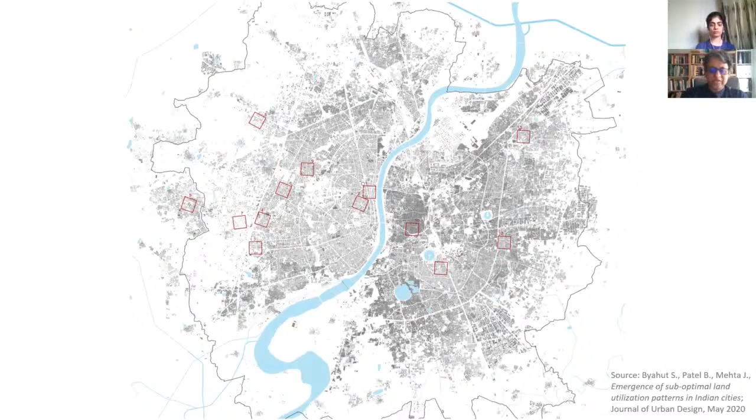These multiple squares represent different areas studied to understand land utilization. For example, this is Ahmedabad's central area, the Ashram Road. If you look at the area covered under building footprints versus private domain versus public domain, the pie chart shows almost 57% of the area is under private open space, only 26% is under building footprint, and only 17% is in public streets and public open spaces.

So if you see how well our cities and urban patterns are utilizing urban land, only 26% is really built, and 74% is in non-built domain, with 57% of that being private open spaces.

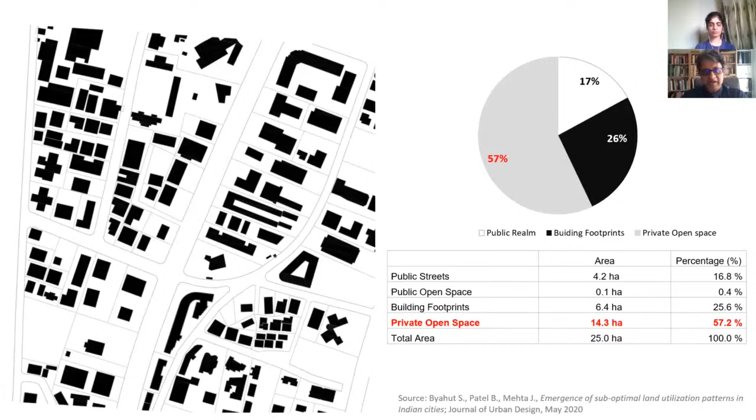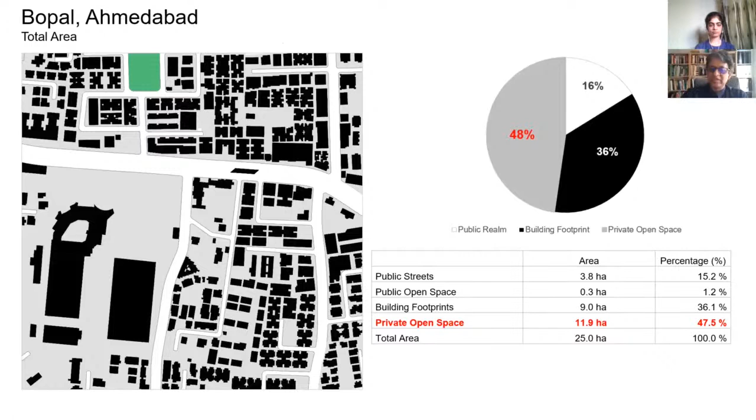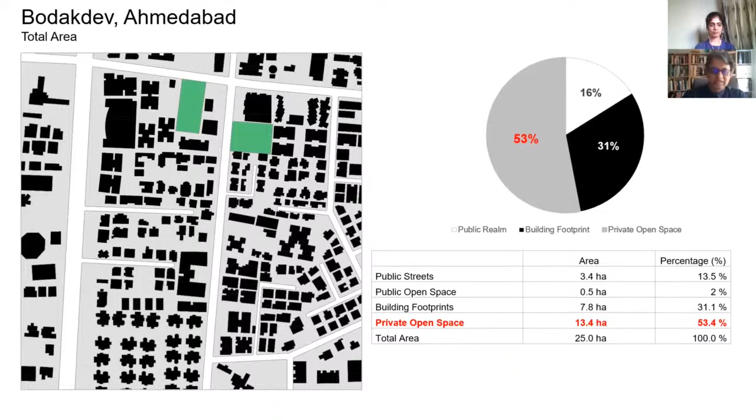In other areas of Ahmedabad, for example Bopal, the breakup is almost 48% private open spaces, 36% building footprints, and 16% streets and public open spaces. Another area, Bodakdev, relatively newer, shows a similar pattern: 53% private open spaces, 31% building footprints, and 16% streets. Science City shows the same story.

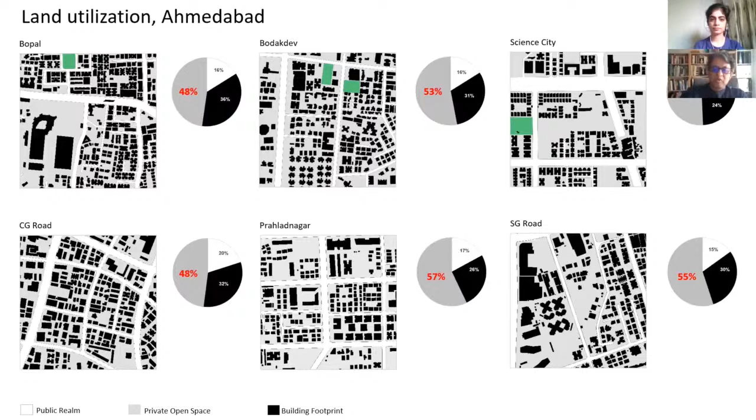Essentially, what's happening is that almost 50% or more of our urban land is generally within private open spaces, and the other half is divided between built area and usable public open spaces like streets and green spaces.

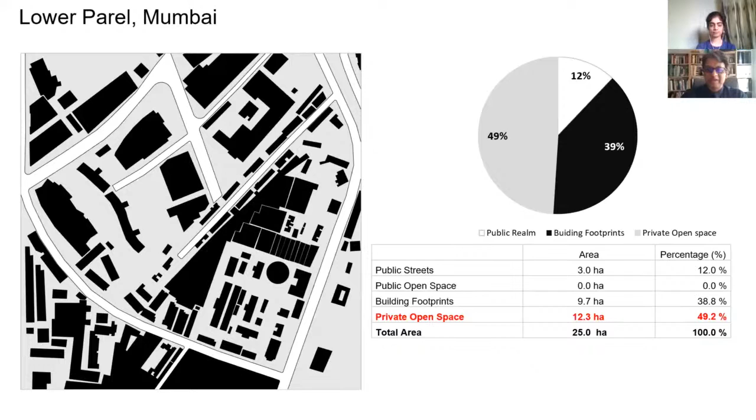Similar story in other cities like Mumbai. This is Lower Parel, and converting that into the same diagrams, you see almost 49% as private open spaces. Here the street percentage is even lower, with large blocks, only 12% under streets, and virtually no public open spaces, though there might be private ones. 39% is built, and if you know this area, you'll see newer high-rise developments, some industrial sheds, and some informal settlements, all combined making up that 39%.

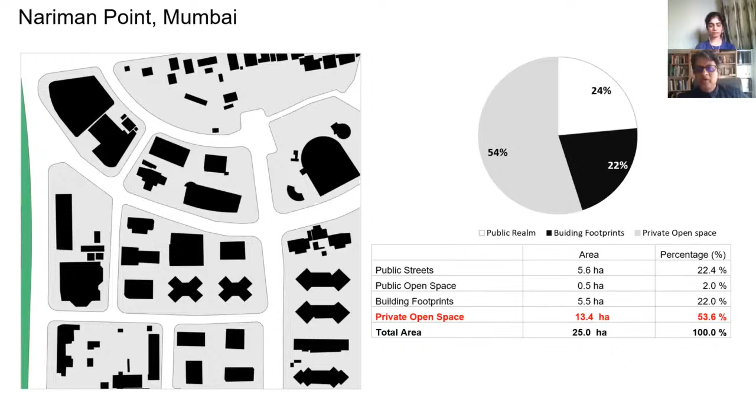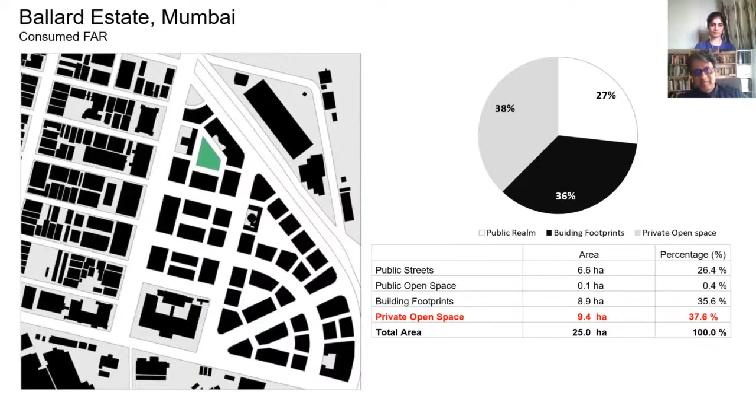Nariman Point, a more organized area, shows 54% private open spaces, with relatively more public open space at 24%. BKC shows a similar story. Ballard Estate is a bit different - an older area where 36% is built, 38% is private open, and 27%, relatively higher, is in public open spaces.

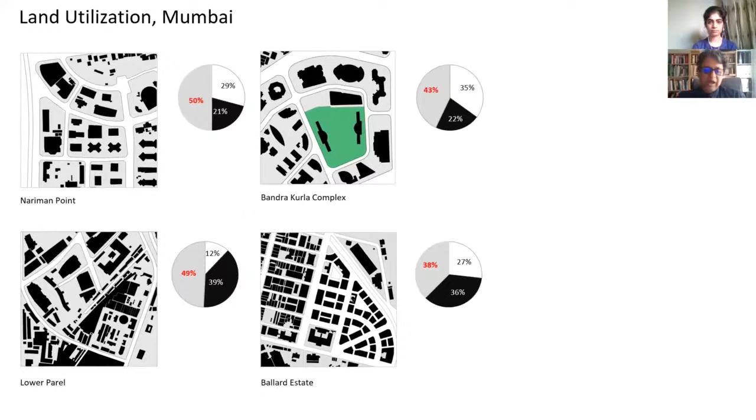So essentially, when you start looking at how urban land is utilized, you realize almost 50% or more of the area is in private open spaces. We'll talk more about that.

Compared to that, if you look at cities abroad, for example downtown San Francisco, you won't find much private open space at all. Most of the land area is covered either by built structures or by streets and green spaces, all of which are utilizable by people.

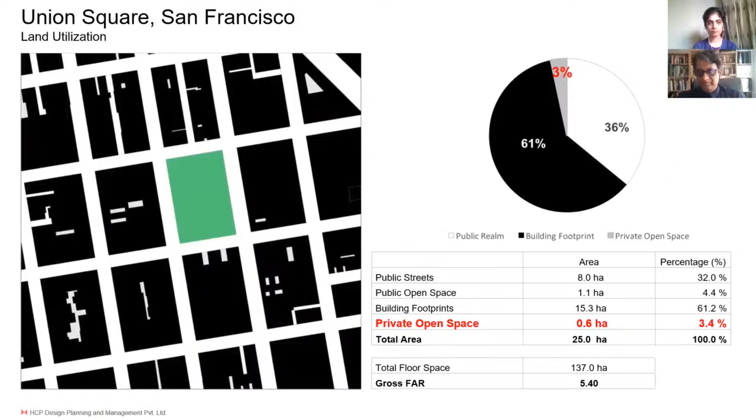Similarly in Paris, more than 50% is built, 34% is public open, and only 10% is private open. Even those private spaces are in the rear of buildings, either courtyards or backyards.

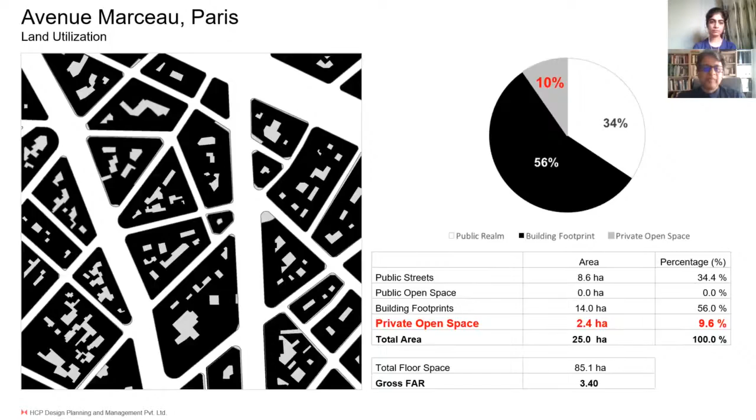Barcelona shows a similar pattern. Then the eastern example, Hong Kong's Mong Kok area, again shows almost 50% public open, primarily in streets, because here the block sizes are very narrow and small, with the street area much bigger.

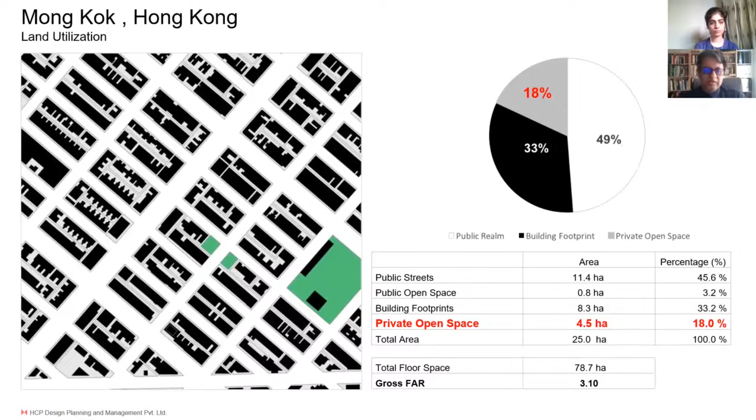So the question is, how efficiently is urban land utilized in Indian cities? As we said, approximately 50% or more land remains under private open space even in recently developed areas. These private open spaces are cut up into multiple small slivers and margins with compound walls and other encroachments, and most frequently covered with illegal, temporary, or permanent structures or plinths. So they generally end up not being efficiently used. The resulting urban patterns have inefficient use of land, with encroached margins, compound walls, and incoherent, unintentional built form.

So what has caused such urban patterns in Indian cities? The answer lies in the DCRs, the Development Control Regulations, which govern these private open spaces.

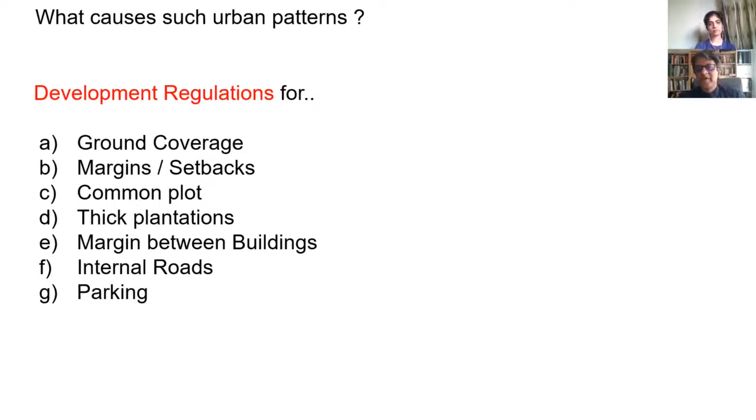And these are those regulations, if you see: ground coverage, margins or setbacks, common plot requirements, thick plantation requirements, margin between buildings that are required, internal roads, parkings - all these elements. Some of them are important, some are critical, some are not. But all these combined together really impact the private open space requirement.

So the question is, why such regulations? They are commonly accepted as standard practice without much questioning. They are based on certain underlying assumptions, which are never made explicit, nor are they based on any empirical studies or evidences. So what I would like to do is question some of these underlying assumptions and see whether we really need these kind of regulations, or can we change them and keep only the ones that are necessary, and get rid of the ones that are not necessary, to improve the urban form of our Indian cities.

Okay, there are a few underlying assumptions. One, for example, ground coverage regulations provide much required open space in our cities. And it's an assumption - a lot of people would generally believe it's true, but we need to really think about it. The next one is about margins.

Margins are required for fire safety - another assumption. Margins result in addition of green spaces. Margins and ground coverages are a must for air and ventilation. Margins are required for parking. Common plots are required for community gathering and play areas.

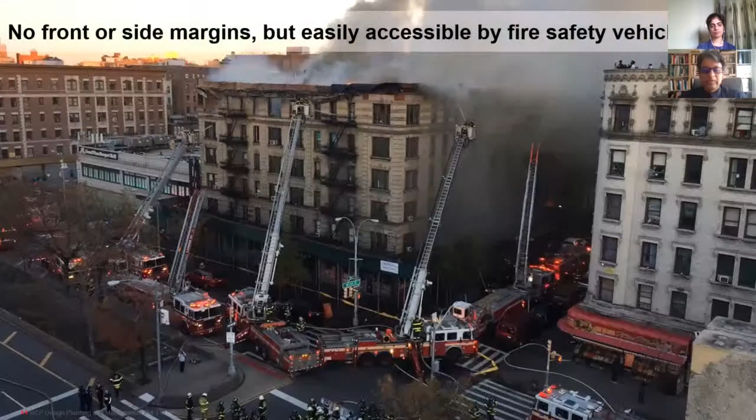So some other visuals. The other assumption people end up making: margins result in addition of green spaces. In reality, only a few of these margins result in green spaces. Generally, they are all covered, paved for different purposes, primarily for parking, and you would find very little green space in these areas.

And for various reasons, they would pave it over, either for parking, or maybe so that the dust problem is reduced, or sometimes people say greenery brings mosquitoes and other things, so they end up paving it over. So if these margins are combined into a single common space, instead of having them in front or side, it will result in much larger, easily accessible and more usable green spaces.

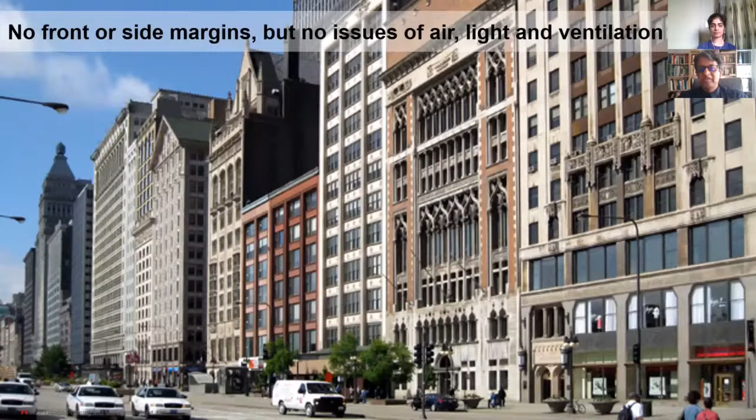This is the so-called front facade of the city of Chicago, the Michigan Avenue, and these are all old high rises, new high rises, and you can see where are the margins, and still all of these buildings work very well. There are different ways of getting light and ventilation.

In Western cities, more often now they use air conditioning, but also the older buildings had atriums and also ventilation from the front and the rear. These are some of these older patterns where it's only the front and the rear, and also we have examples of Indian cities.

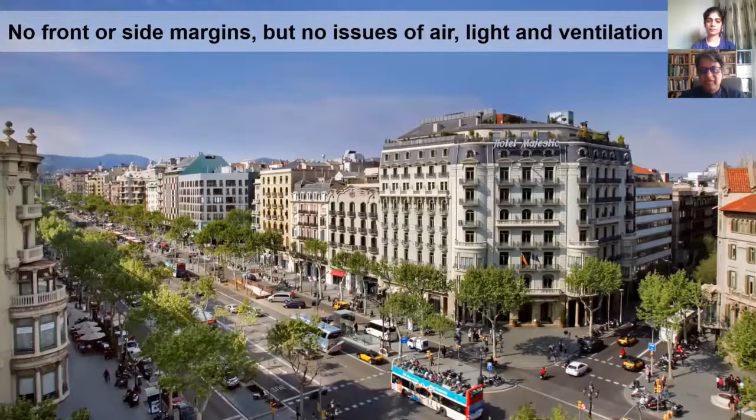Delhi's urban patterns, or if you look at Jaipur, for example, old cities, and most of our old cities, they didn't have side margins. Old city Jaipur, old city Ahmedabad, all the pol houses, or any other such old cities. Essentially what I meant to say was that there are various different ways, and you don't have to have margins for those things. There are different ways in which you can deal with it.

The next assumption is margins are required for parking. A lot of times that's why people say we have to have front margins, because otherwise where would people park? In reality, margin spaces remain a lot of times vacant, inaccessible for vehicles, and underutilized in a lot of cases.

Here's another example where the front margin, the roadside margin, the plan would be passed showing that people will be able to park their vehicles in the front margin, and therefore it satisfies the parking requirement. But then you end up seeing that all the vehicles are parked on the road. Similar cases exist in a lot of places.

Next one is common plots. Common plots are required for community activities and for children to play, which is true. But very often, these spaces are also encroached by parking. And if you see a lot of these regulations, they require common plots even for commercial buildings.

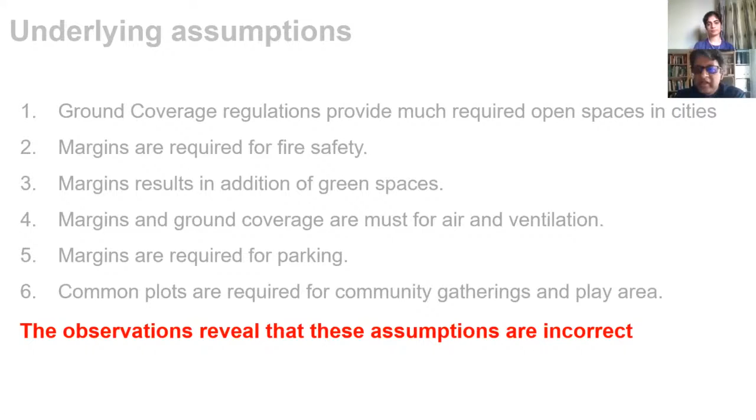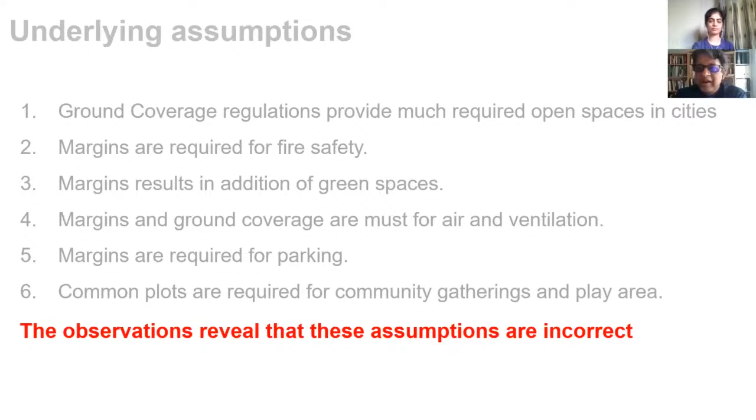So these observations really reveal that a lot of these assumptions are not accurate. I would not say they are absolutely incorrect, but a lot of times they require questioning, and that's what we need to do. We need to figure out what kind of regulations we need to have to achieve the right urban form and the right urban environment. So how can we really improve the regulations?

Our current development patterns are a result of conventional approach to zoning and regulations. Is there another approach? And the answer to that is yes. There is a conventional approach, which is pretty much a rule-based approach, but also then there is a form-based approach. And that form-based approach is derived considering the ultimate outcome of urban form, and based on that, everything is identified.

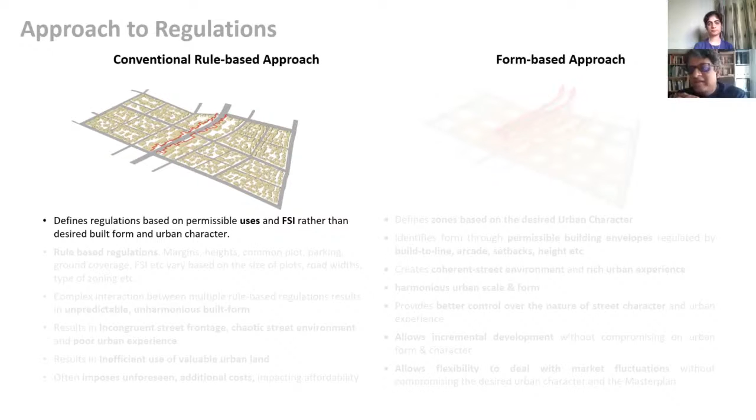So let's just quickly go through one by one. Generally, conventional rule-based approach would define regulations based on permissible uses and FSIs rather than desired built form and urban character. We all know the zoning and regulations the way it is done in our cities, and generally when such plans are prepared, the ultimate urban form is not really the focus. The main focus is how many people will come and live here, and whether we'll have sufficient infrastructure and urban amenities. Yes, all those things are necessary, but also more critical is the urban form.

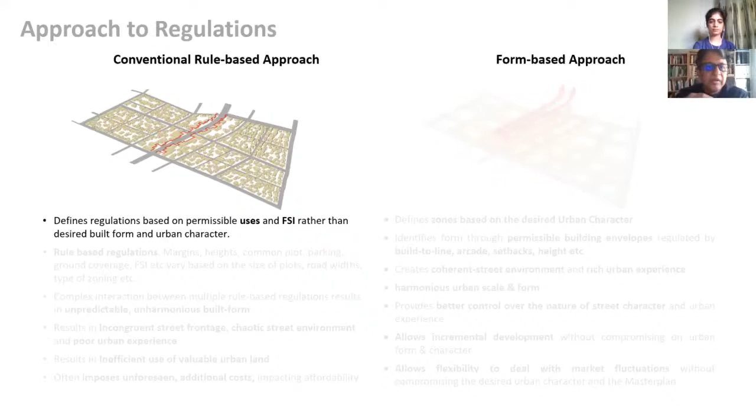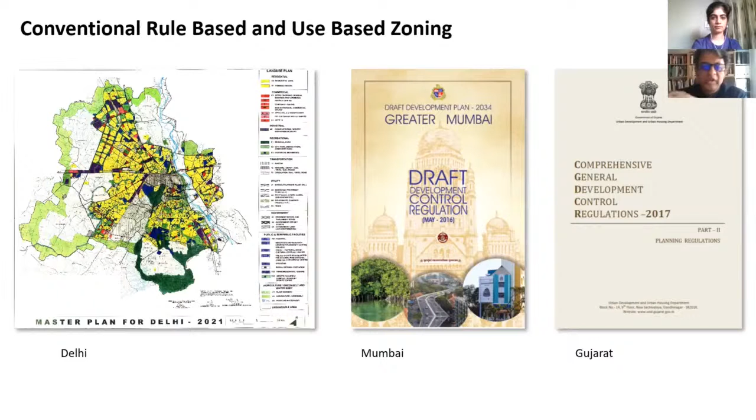These are examples of conventional rule-based zoning and regulations. All of our current regulations are more or less this conventional patterned regulations. The rule-based regulations include rules for margins, heights, common plots, parking, FSI, etc., which all vary based on either plot size or road width or different types of zoning. And when you actually start putting all these regulations together, it's very difficult to really imagine what kind of urban form would come out of it.

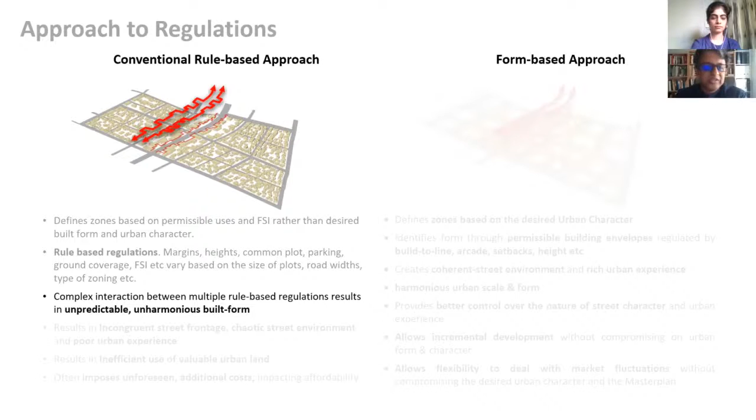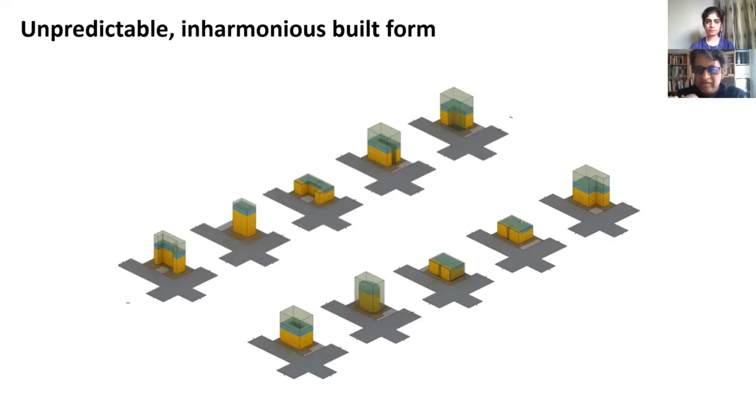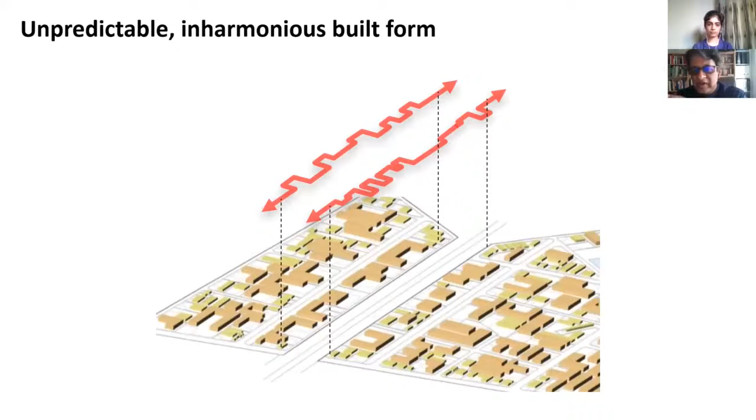The complex interaction between these multiple rule-based regulations results in unpredictable, unharmonious built form. You can see the same regulations can result in all these different building types and building forms. So you can imagine a street with one set of regulations but not having coherent built form, and that's what generally ends up happening. Now you don't have very clear street frontages, or very clear urban patterns, different heights, different things. So the ultimate result is incongruent street frontages, chaotic street environment, and poor urban experience.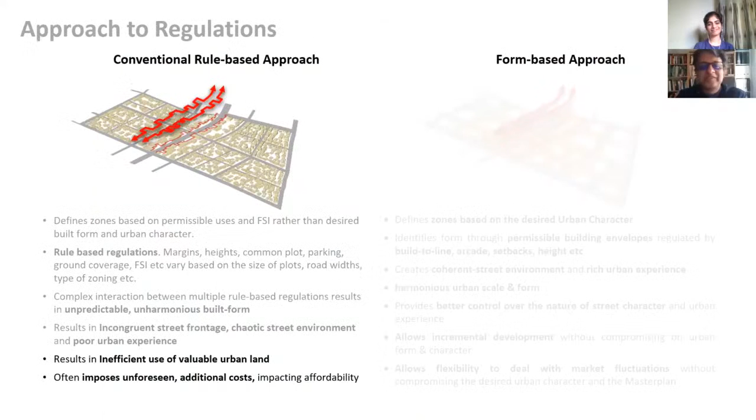You all know many of such places. And it also results in inefficient use of valuable urban land. Often it imposes unforeseen additional costs and impacts affordability. So compared to that, when you start looking at...

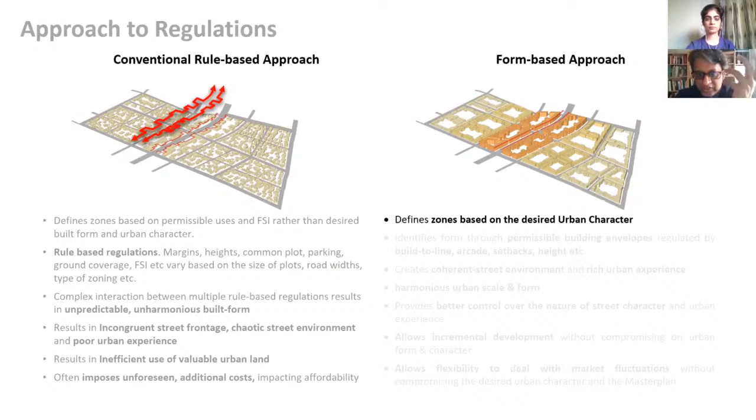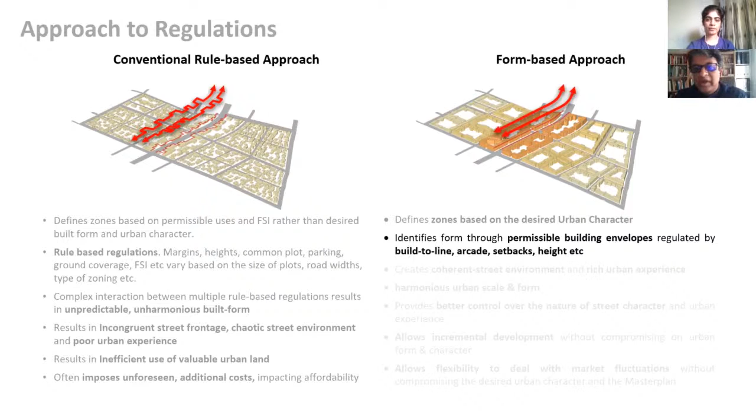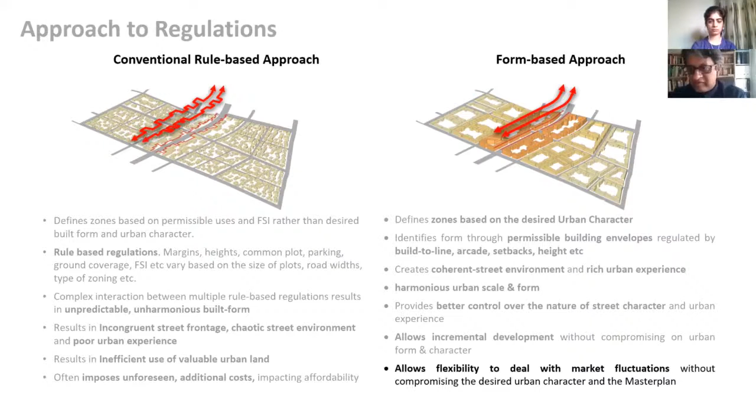Form-based approach generally defines zones based on the desired urban form and character. It's not rule-based - it considers first the ultimate urban form, and also identifies form through permissible building envelopes regulated by build-to-line, arcade, setbacks, heights, etc. This creates a coherent street environment and rich urban experience, harmonious urban scale and form, and provides better control over the nature of streets and street character and urban experience, allowing incremental development without compromising on urban form and character. So with this form-based approach, regardless of which area develops first or next, the urban form remains coherent, and it allows flexibility to deal with market fluctuations without compromising on urban character.

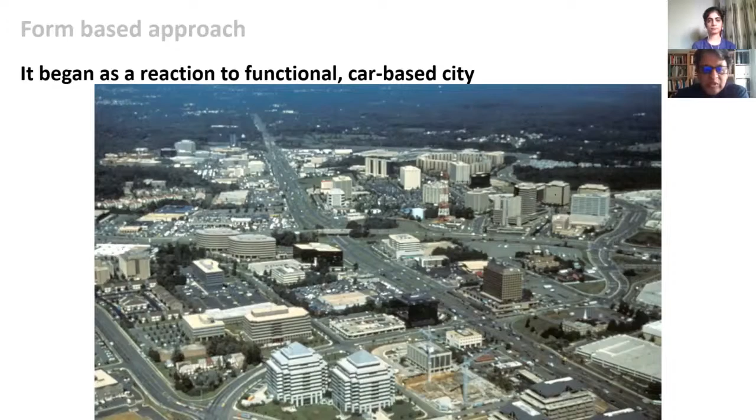Let me go back a little to the background of how this urban form-based approach came up. It began with people realizing that the functional approach to city planning had resulted in very auto-oriented, car-focused cities. This was a realization about four decades back, primarily in Western countries, where people started realizing our cities are actually made for cars and not really for people. It's very difficult for people to walk and navigate through these cities, and not just city centers, but also suburbs started becoming car-based, making it almost impossible for a person to get out of their home and just walk to shop, or to school, or to get anything really.

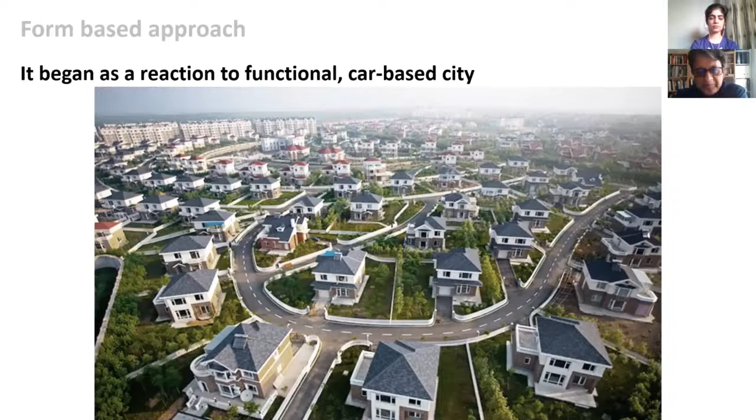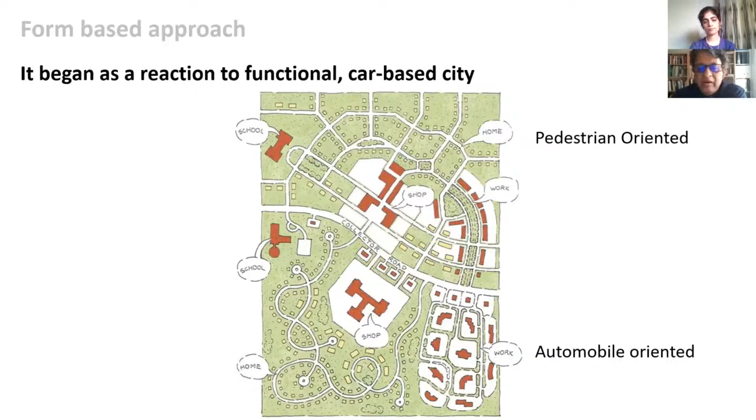So the approach really started - people began exploring new approaches, and they realized there are other ways of planning cities which can be pedestrian oriented instead of automobile oriented. You can see these two patterns: the pattern in the north is more pedestrian friendly because it offers easy walkable development - easy walk to shop, work, school, etc. Versus the lower part, which is completely auto oriented, because if you want to go from your home to shop, you'll have to get into your car, drive to the main road, and then go into your mall. So that's the conventional pattern versus the pedestrian oriented pattern that you need to achieve.

And that gave rise to the new urbanism movement. What they started thinking about was the transect - not based on residential, commercial, institutional use, but based on urban character. They identify the transect based on the urban core zone, which would have high urban character, then urban center, general urban zone, suburban zone, then rural and natural. And based on that, various elements are regulated.

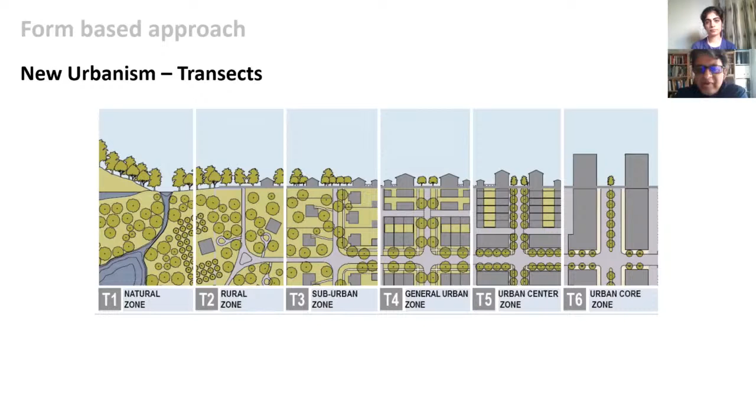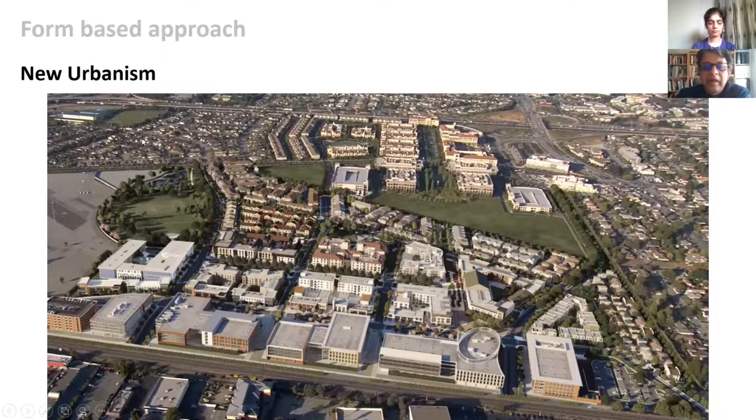And on ground, you start seeing the patterns where you have arcades, colonnades, also balconies overlooking the main streets. This is the commercial part, but the residential part would have similar elements. The porches and balconies would be opening on the street. The streets would have sidewalks which are walkable.

This is another area, in San Jose. So there are these newer patterns where you generally will not see front margin or side margin. Will not really see parking in the margins. Parkings are generally managed on the street as short-term parking, and they are managed with appropriate parking fees.

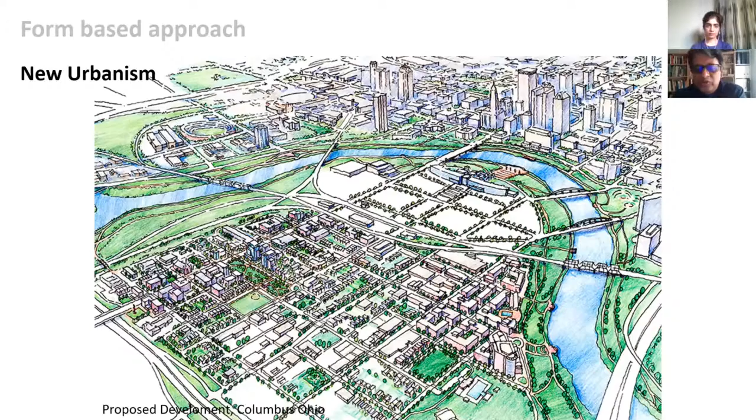And then this whole idea started getting expanded from small neighborhoods to larger cities. So slowly the cities also started looking at that as a desirable thing, and they started planning some of their areas. I would not say the whole city would — it is still difficult for a city to change the regulations wholesale. But they started looking at different areas and started changing the regulations, so different zones would start having form-based regulations.

And the influences also extended to India. So it's not just a Western concept now. Slowly you start seeing such things in the Indian context also.

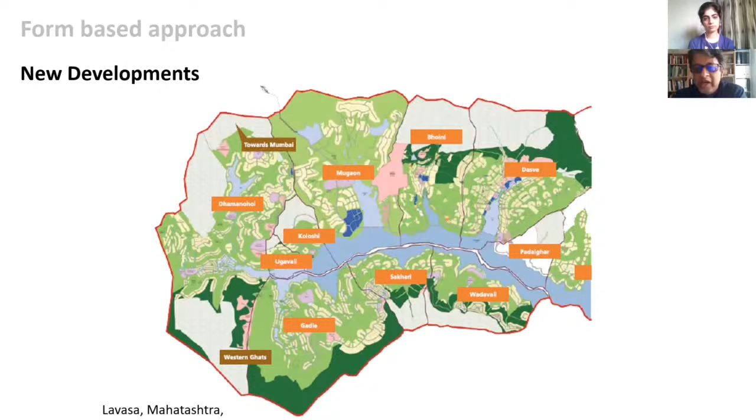This is Lavasa in Maharashtra. Lavasa was also based on these concepts of new urbanism, where you start seeing the buildings aligned on the street, fronting directly on the streets with arcades, colonnades, all the balconies opening there. No front or side margin. Parking generally happens in the rear, and all the community spaces generally go in the rear as well. So these are the principles of new urbanism followed here.

So what kind of regulations do you really need for coming up with such urban forms? Generally, if you see your conventional regulations, it would have a plan, which is a small report, or maybe a thicker report. But attached to that would be rule-based regulations — some rules basically, without much illustration. They are just simple rules that you have to read and follow, and you just keep flipping your pages from here to there to figure out exactly what is applicable to your plot.

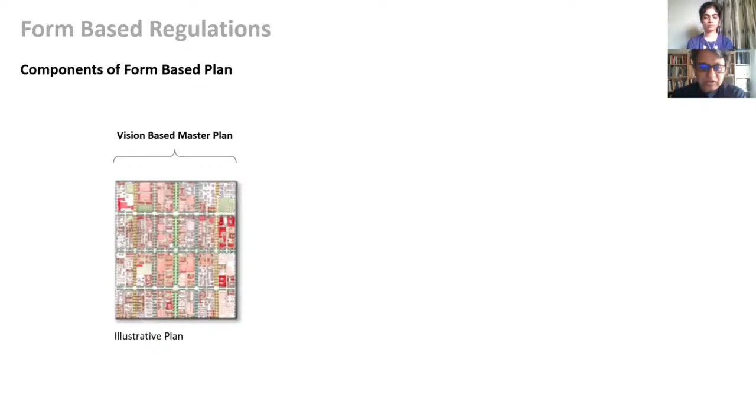Versus when you talk about the form-based approach, there are various elements to it. First it would have the vision-based master plan, and that really envisions the urban form. Once the urban form is envisioned, there is also a zoning map, but that zoning map is a form-based zoning map — so what kind of urban form should come where. And then there are form-based regulations, which I'll also share, but they are primarily focused on what kind of building form and building typologies you would have in different zones.

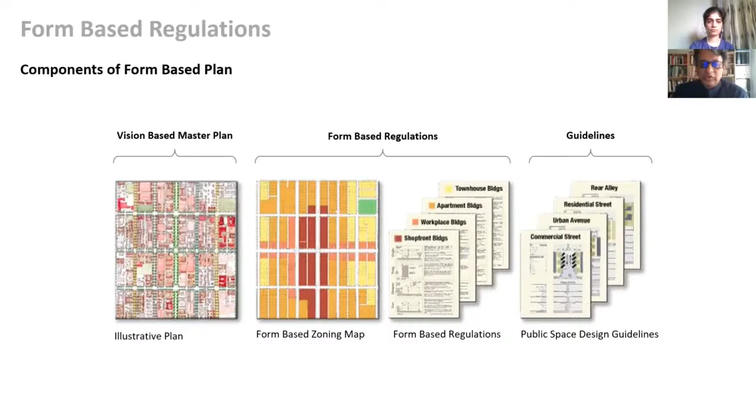And then there are also guidelines, primarily for public spaces like streets and public open spaces. So combined, all these elements would form the form-based regulations. Some examples — I'm just going to flip through this slide. Miami, for example, started changing their planning approach to a form-based planning approach and form-based codes. In the US, the regulations are called codes, so they are called form-based codes.

And here particularly, I would draw your attention to the kind of terminology they end up using. A conventional zoning document would have residential, low density residential, high density residential, commercial, industrial, institutional — those kinds of zones based on their uses. Versus here you start seeing suburban character, general urban zone, urban center, urban core. Nowhere generally will you see use-based terminology — they are all character-based terminology.

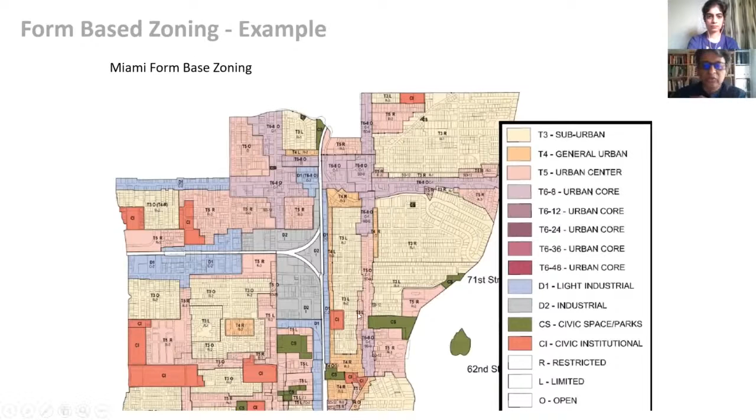And if you zoom in, these zones are also defined based on what kind of experience you would have on the street. So generally the same zone would be allocated on both sides of that street, and that's where you start seeing some of these longer zones — the same zone on both sides of the street.

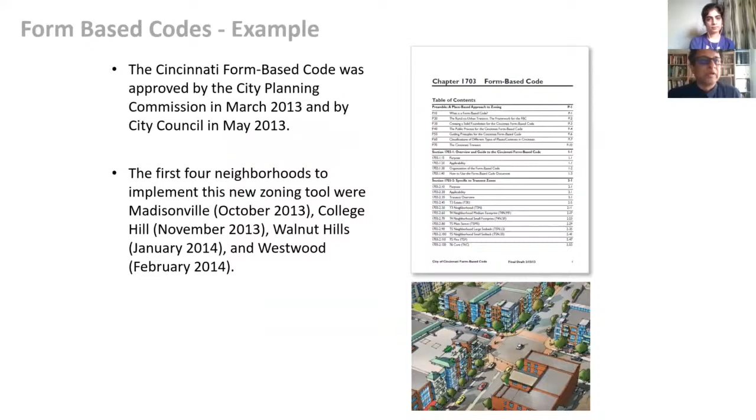Similarly, the city of Cincinnati also explored form-based codes, and they organized it pretty well. You can see there are various transects, like T3, which includes T3 estate, T3 neighborhood, and T3 neighborhood with medium footprints. So there are various types identified. The first thing they talk about is the kind of urban character they would like to see, starting with illustration, and then the desired urban form.

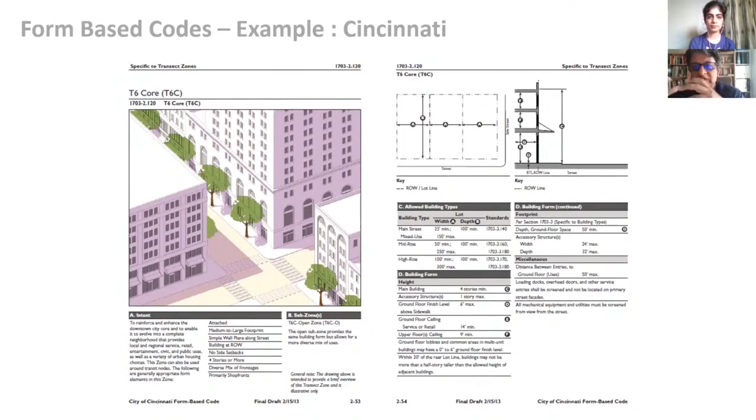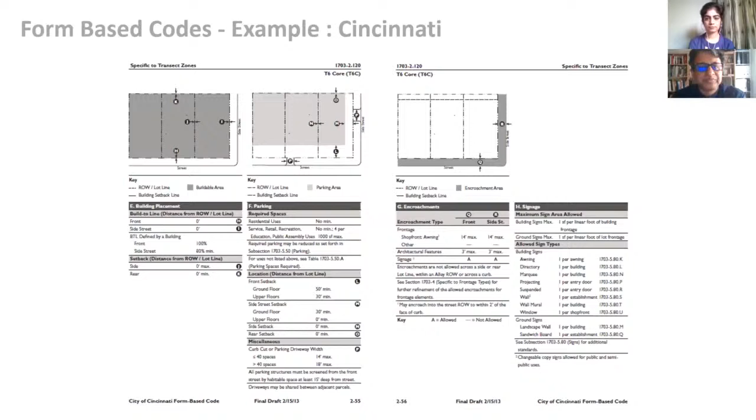Then they talk about other regulations like use and intent, and get into more details of the various elements you would see on the street, then height, parking, footprints, and all of those things. The idea is that your main priority is the urban form experienced by someone visiting or living in that area, and then there are other regulations, all very well illustrated, going into detail.

In the Indian context, there are very few examples, but there are explorations. One would be the riverfront volumetric plan. The Sabarmati Riverfront Development Corporation's plan is very much volumetric — meaning it defines the permissible buildable footprint, permissible buildable area, and permissible height up to which you can build. So it defines the volume, instead of specifying margins, common plot, or parking — within this permissible volume, you can build whatever.

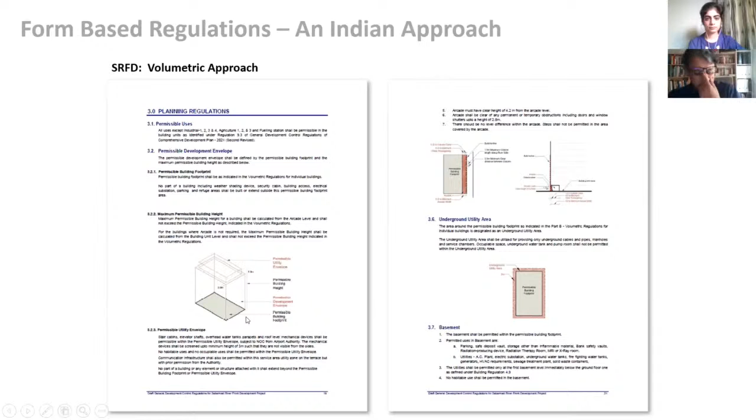The components are a plan, regulations in text format, and regulations with drawings — and the drawings are very important, so you have well-illustrated regulations. It defines permissible building height, permissible building footprint, and permissible overall building envelope, with some service volumes on top — those things are clearly identified.

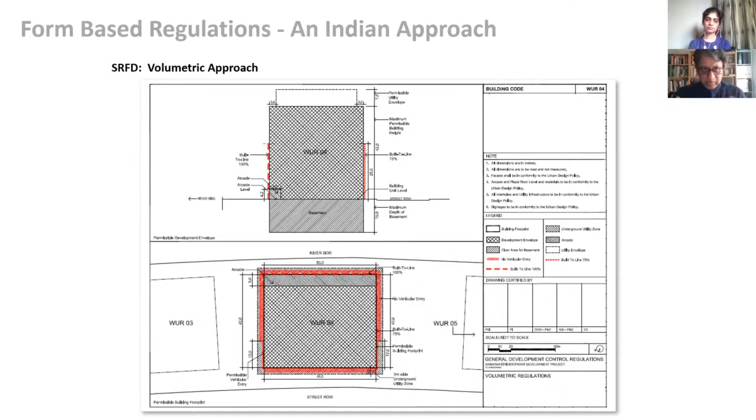Each permissible building footprint is represented through a drawing, clearly showing how much you can build, up to what height, and what your build-to line is. For example, it might specify 75% build-to line up to 25 meters height, then a setback after that. This is a volumetric approach — not fully form-based, but heading towards form-based. It's basically a form-based approach in the Indian context, with some volumes imagined.

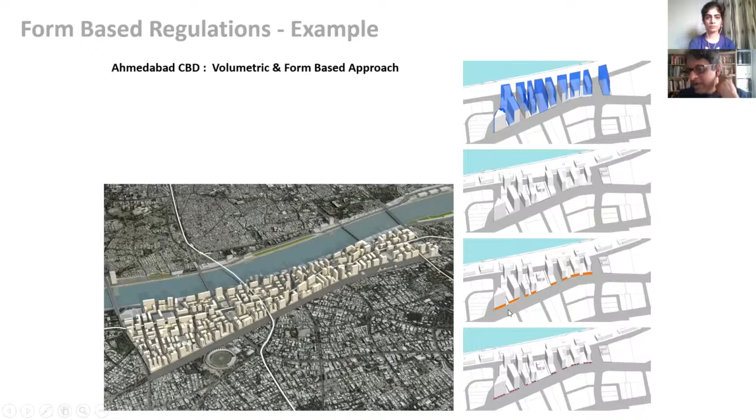In Gujarat now there's a new local area plan mechanism, and the LAPs generally take a more form-based approach — though not fully form-based, more a hybrid of form-based and conventional. This is the proposed CBD of Ahmedabad, where they again define a permissible buildable volume, shown in blue, and identify where you have build-to lines and where arcades are required. Detailed drawings clearly show build-to line requirements of 50% or 100%, where there's no vehicular entry, arcade requirements, and permissible building footprints.

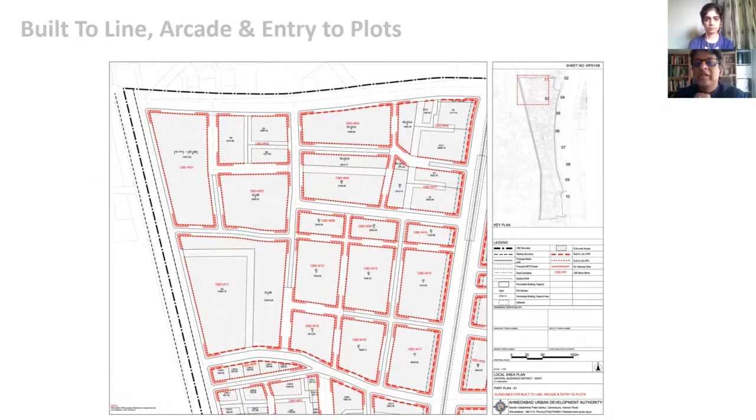As a last example, places like Bhutan also started experimenting with the form-based approach. Such places found it useful because the traditional Bhutanese architectural code is quite similar, so they end up going hand in hand. The main purpose of the Bhutan architectural codes is preserving and creating new development consistent with the current urban form of the area, so the form-based approach generally works very well there.

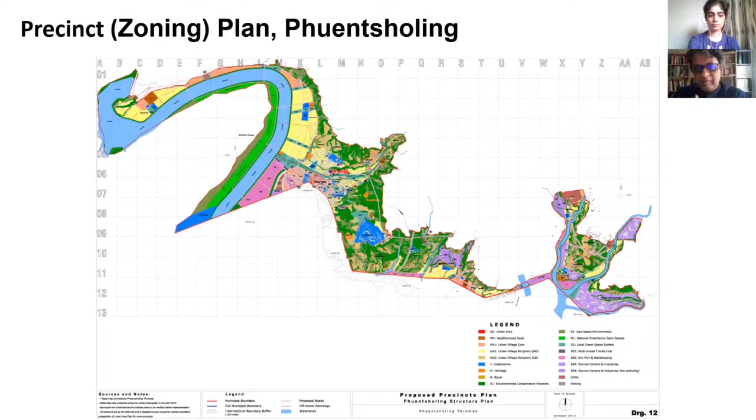I'll quickly run through another example: Phuentsholing, a border town between Bhutan and India, where new development is being planned along the river Amochu. During planning, the whole plan was conceived by thinking about the kind of urban character and urban form the new development would have, and based on that, the zoning was identified and regulations written. This is the precinct map — they were not called zones, but precincts.

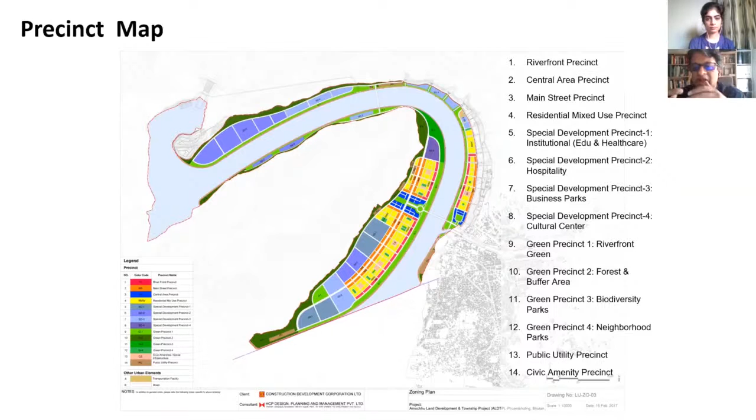And you have various precincts called riverfront precinct, central area precinct, main street precinct, residential mixed use precinct. So again, you start seeing that they are not really use-based, but they are character-based terminology. And then each of those precincts would have specific regulations.

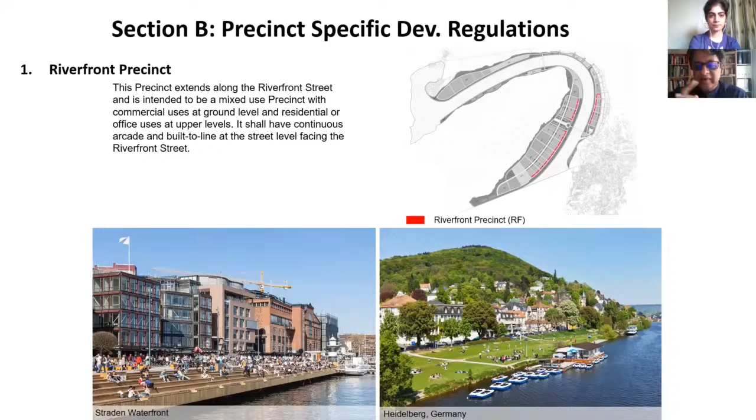And the regulations, I'll just browse through a few of those. For example, riverfront precinct, first it would start with what kind of urban character you would like to have there, then what are the permissible uses, and also what are the minimum dimensions for the plot. So no side of the plot shall be less than 24 meters.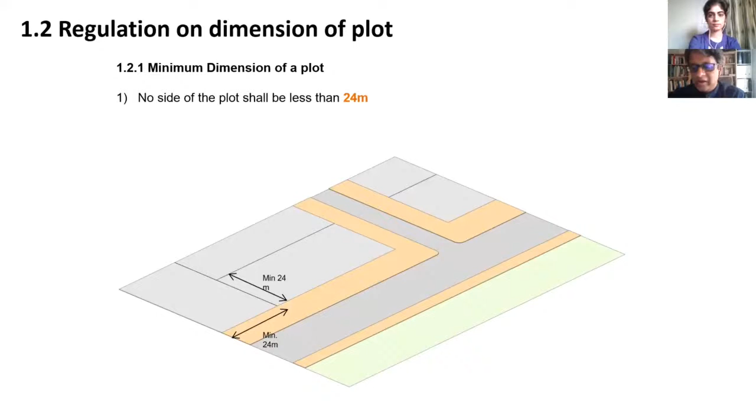This is again to have a certain urban character. And then in terms of setbacks, they're saying roadside setbacks, no roadside setbacks required, no front margin. Side and rear setbacks, 3 meters. And also within a plot, if you're building 2 buildings, between them you need 6 meters.

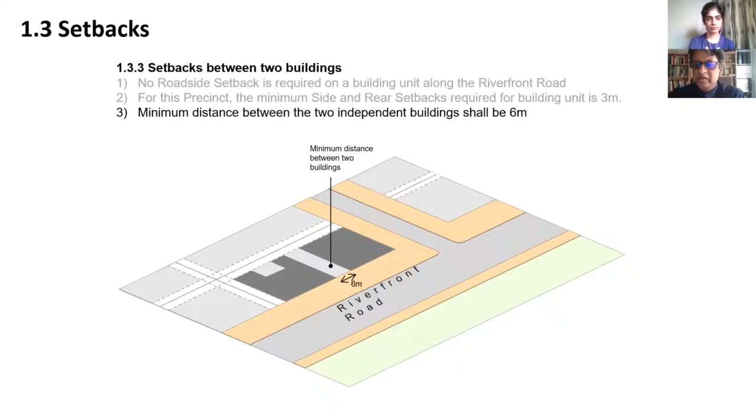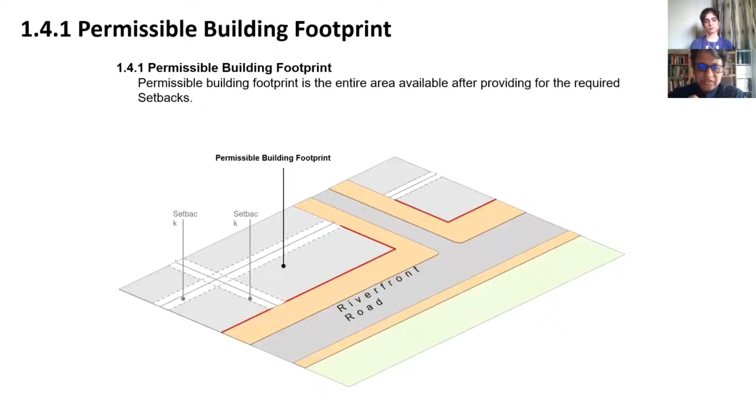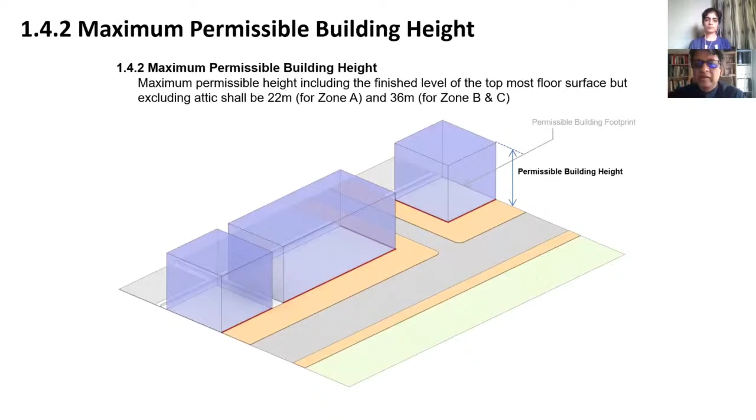So that's your basic regulations related to ground coverage. And then permissible building envelope in terms of height - the margins really define the permissible building footprint. No front margin, only side and rear margin. And you are permissible to build up to 22 meters in this particular zone. So that's the permissible building height and permissible buildable volume.

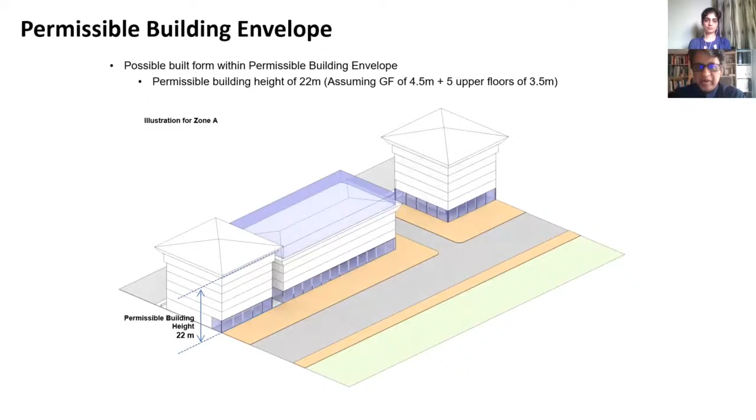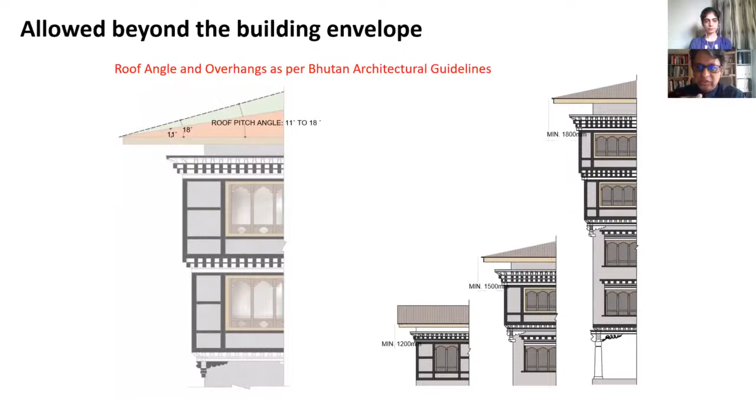And within that, then you have to also follow the Bhutanese architectural guidelines, Bhutan's architecture code. So that's where some of those elements like sloping roofs and rabsels would come in. And that sloping roof also has a regulation of what angle it should be - 11 to 18 degrees should be the roof pitch. And depending on the height, your projections would vary from 1200mm to 1800mm.

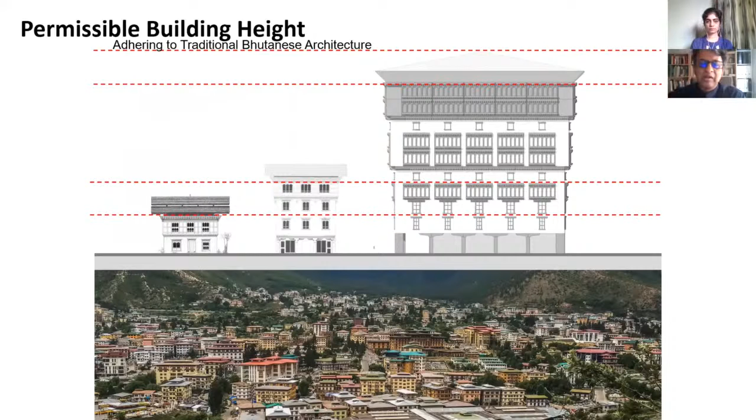And based on that, the overall built form would come up. Also, multiple studies were done to define the height - why you could not go beyond 22 meters. Generally it was thought that with the building proportions they have, 22 meters is the ideal. Later on, there were also considerations about going higher, and in that case the building footprint would become bigger.

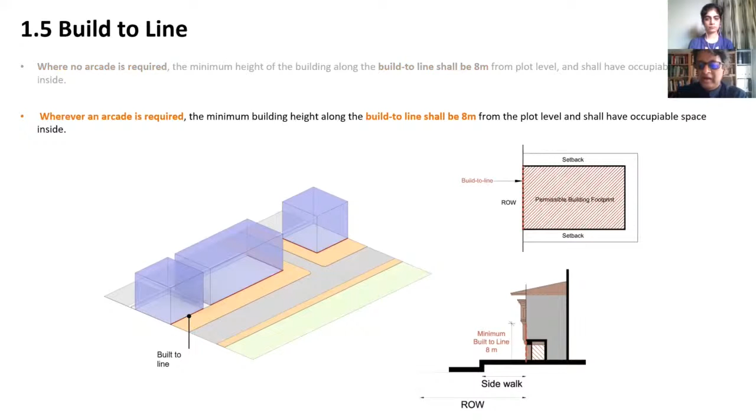Also built to line - there are very strict regulations for this. At least up to 8 meters, you have to have that built to line. And generally after that, you can set back, but Bhutan's architectural code would not allow setbacks. Instead, they require set front, meaning projections in front, as per the architectural language there. And we'll talk about that.

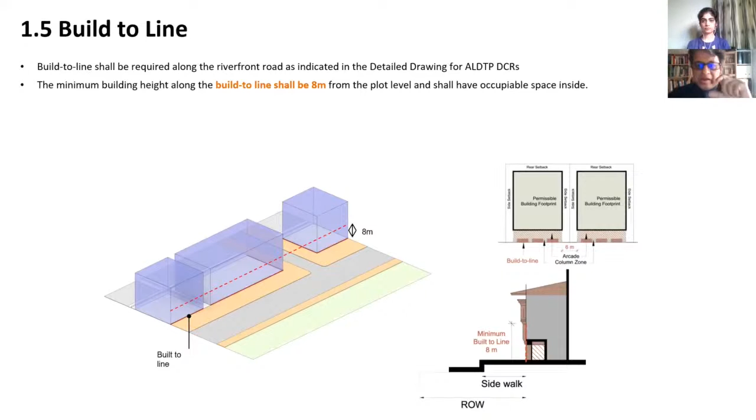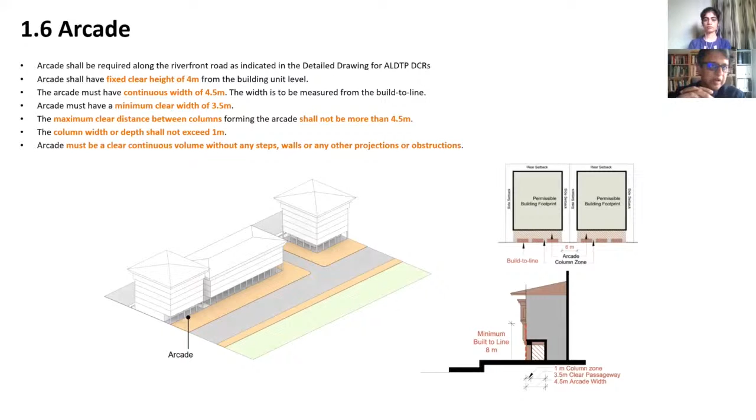What it requires is the arcade on ground level, and that arcade should be of a minimum certain size - the arcade shall have a fixed clear height of 4 meters, and the arcade must have a continuous width of 4.5 meters. So all this is to really govern the built form.

And then you also have the permissible projection area. As I mentioned, Bhutanese architectural codes require rabsels or step fronts - they require projections, and there are guidelines for those projections. So in order to incorporate that, there is 3 meters of permissible area within which you can do the projection on the street.

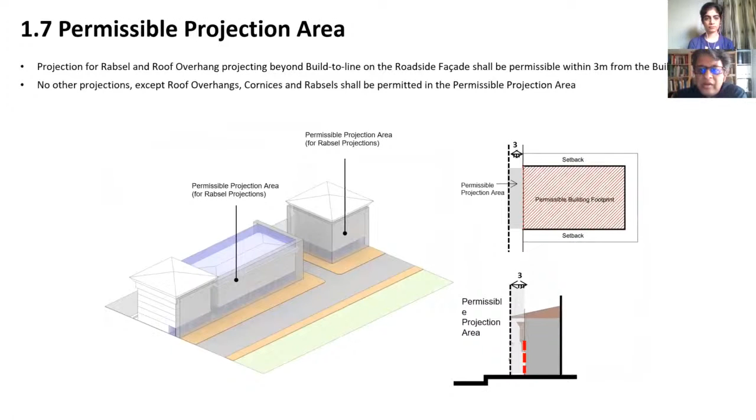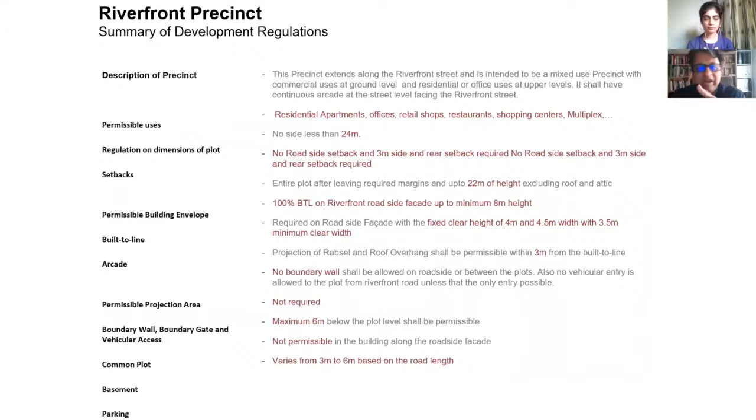So these kinds of things are also added in, and there are various other regulations for each zone. Now the regulations are structured so that you don't have to keep flipping pages from back to front - for each precinct, you have all your regulations in one single chapter. So first you simply identify where your plot is, which zone it belongs to, and then you refer to those regulations.

So those are a few examples of the form-based approach in our context, and I hope it's going to help the young planners and young urban designers.